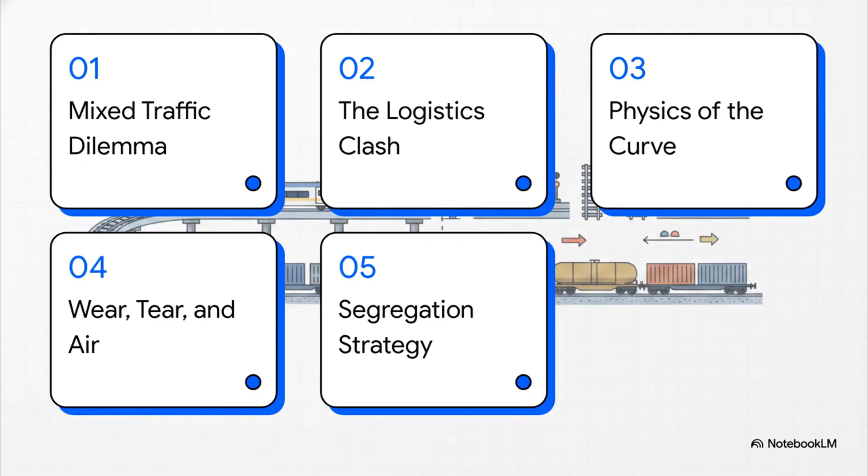All right, starting us off, Section 1, the mixed traffic dilemma. Let's look at our track usage options. We essentially have 4 ways we can run trains across a network. It's kind of like a sliding scale. Up at the top, in case 1, you have total segregation. High-speed trains stay strictly on high-speed lines, and classical trains stay on classical lines.

But as you move down to case 4, you see complete intermixing, where all types of trains run on all types of lines. And while systems in places like Germany and Italy have historically tried mixed models, it sets the stage for some massive constraints. Because honestly, when you choose intermixing, you are inviting chaos.

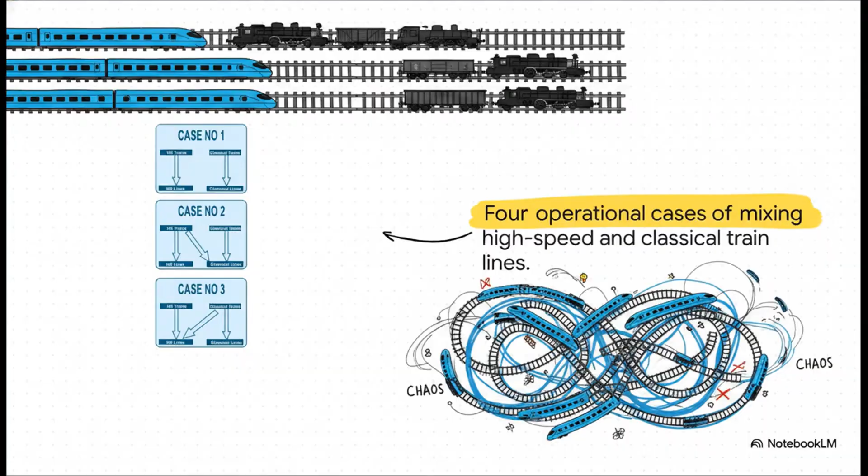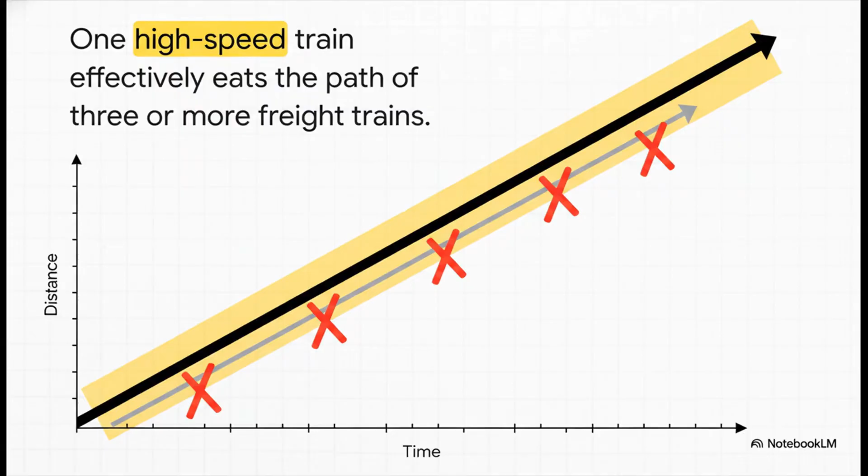Moving right along to Section 2, the logistics clash. Let's talk about the speed conflict. Here is the wild thing from a pure logistics standpoint. If you slip just one single high-speed train, we're talking traveling at over 300 kilometers per hour, into a conventional, slower train schedule, it literally eats up the operational path of 3 or more freight trains. Let that sink in. You aren't just adding a fast train to the tracks, you are actively deleting the capacity for freight.

Picture this on a timeline. At minute 0, a slow freight train rolls out. 15 minutes later, a high-speed passenger train departs on the exact same track. By minute 30, that high-speed train has entirely caught up to the heavy freight ahead of it, forcing a massive system bottleneck. So you basically have 2 terrible choices. You either force the freight train onto a side track to wait, which totally kills its efficiency, or the high-speed train is forced to crawl behind it, completely neutralizing its own speed advantage.

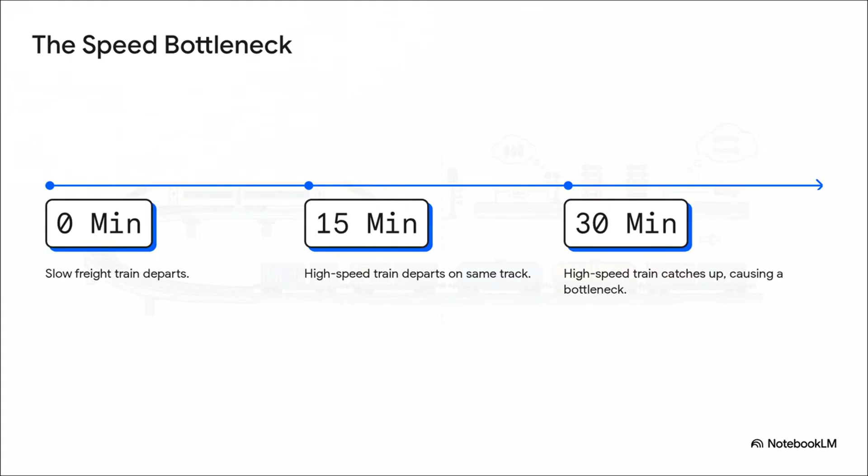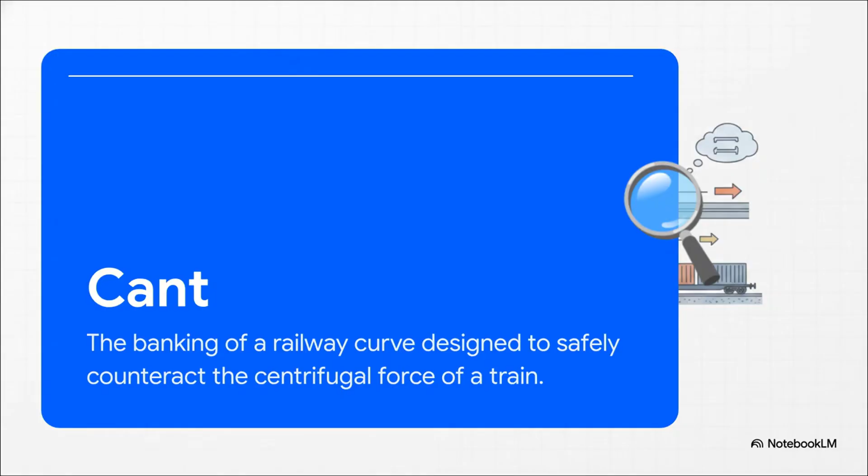Okay, Section 3. The physics of the curve. Let's get into track geometry and cant. Now, to really grasp track geometry, we have to talk about cant, also known as equilibrium superelevation. Think of a steeply banked curve on a NASCAR racetrack. That cant is absolutely essential to keep a train from flying off the rails when it takes a turn. The track is literally tilted inward. But here's the catch. The exact angle of that tilt is entirely dependent on the speed of the vehicle.

Let's put this into perspective with a standard curve that has a 4,000-meter radius. The physics here mathematically forbid any sort of compromise. A heavy freight train cruising at 80 kilometers per hour requires only 19 millimeters of cant. But a high-speed passenger train taking that exact same curve at 300 kilometers per hour requires a massive 265 millimeters of cant. If you try to invent an intermediate bank angle to sort of split the difference, it dangerously exceeds the safety limits for both train types.

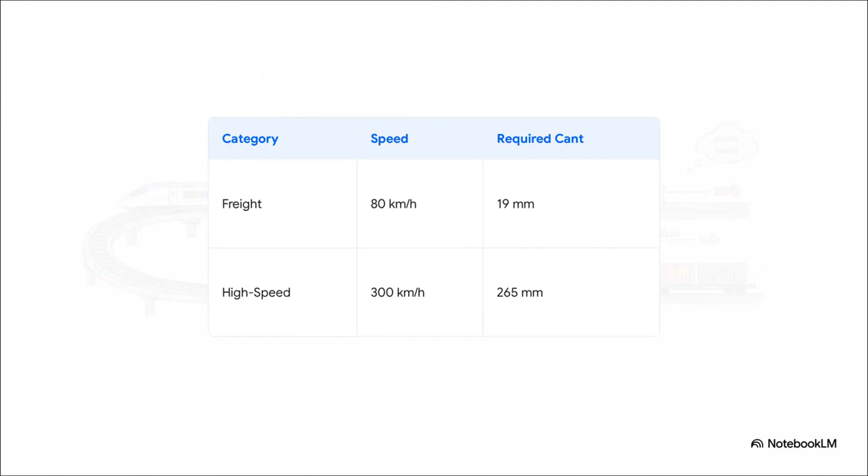Looking at these numbers, you can easily see why providing a track geometry that safely accommodates both 19 millimeters and 265 millimeters simultaneously is literally an engineering impossibility. If the track is banked up high for the fast train, the slow freight train will tip inward, putting immense, destructive weight on the inner rail. But if it's banked low for the freight train, the high-speed train is at a huge risk of derailing right off the outside. You just can't negotiate with gravity.

Which brings us to Section 4, wear, tear, and air, the harsh realities of safety and maintenance. Let's talk about sheer mass for a second. Heavy freight locomotives are absolute beasts designed for raw pulling power, and they exert a brutal, bone-crushing 23 tons of axle load downward onto the steel rails. Now, contrast that massive weight with a high-speed train, like the French TGV. High-speed rail sets are strictly capped at just 17 tons per axle.

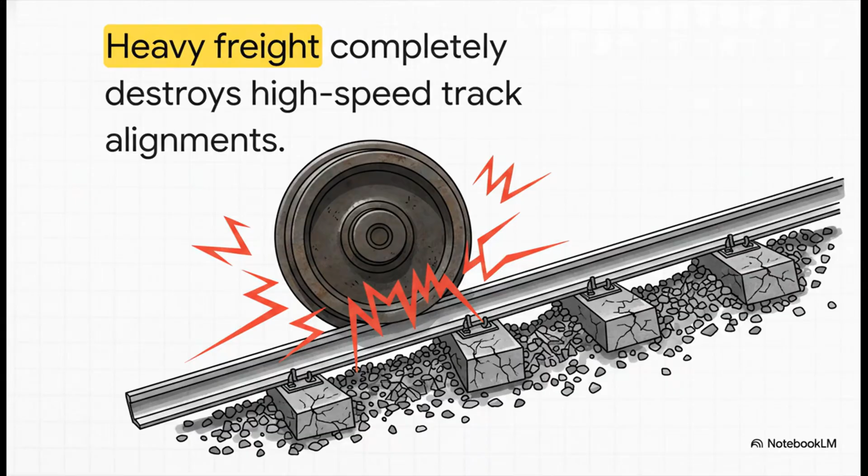Why? Because flying along at over 300 kilometers per hour requires absolute perfection in the track, and lighter axles are what preserve those microscopic track tolerances. So if you run those 23-ton freight beasts over our pristine, highly tuned passenger corridors, it makes it impossible to maintain the flawless track geometry required for safe high-speed travel. Studies have proven that heavy freight quite literally beats the high-speed track alignments right out of place. That makes it incredibly dangerous to then send a passenger train rocketing over it at top speed.

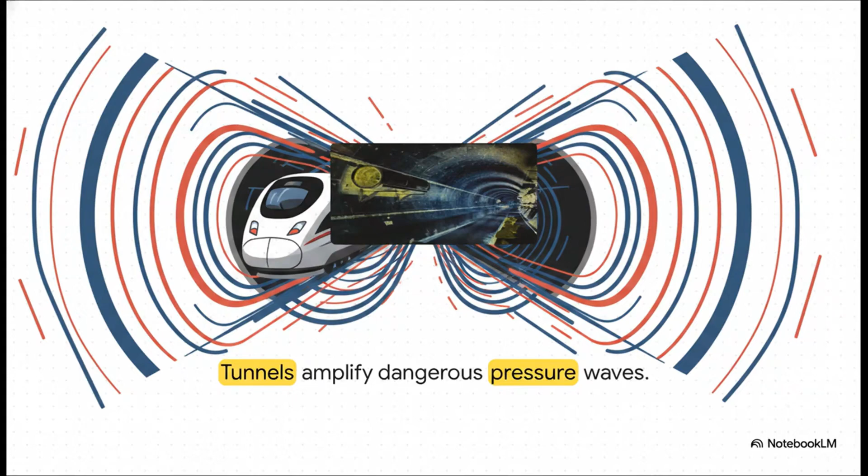And hey, if the track wear didn't convince you, wait until we talk about the aerodynamics inside enclosed spaces like tunnels. It is terrifying. When a train enters a tunnel, it pushes a wall of air ahead of it, acting almost like a massive piston. The sheer aerodynamic violence of mixing these two types of traffic inside a tunnel is staggering. Imagine a high-speed train and a freight train passing each other going opposite directions. The relative speed difference can hit up to 700 kilometers per hour.

That creates an explosive burst of air pressure when they first pass, immediately followed by a vacuum-like drop. These micropressure waves severely stress the passenger train's windows. And even crazier, the sudden shockwave of air can literally destabilize the heavy freight. We're talking violently ripping off cargo covers or shifting entire loads. To avoid an aerodynamic disaster, engineers are basically forced to either drastically reduce speeds or just separate the trains entirely.

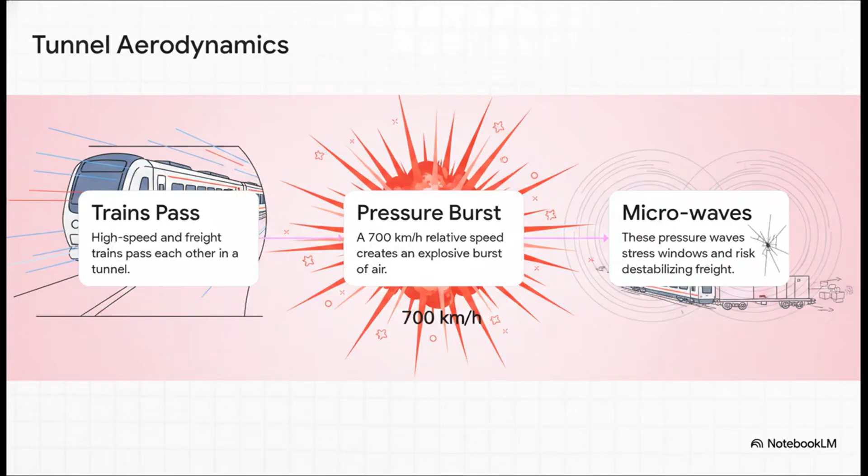All right, our final section, the segregation strategy, why this is the ultimate win-win. So, by building entirely new lines strictly for fast passenger trains, we don't just solve all those physics and aerodynamic nightmares we just talked about, we actually strike an economic goldmine. Yes, it prevents the heavy freight from destroying the new passenger tracks, but crucially, by pulling the passenger trains off the legacy networks, we release massive path capacity on those older lines.

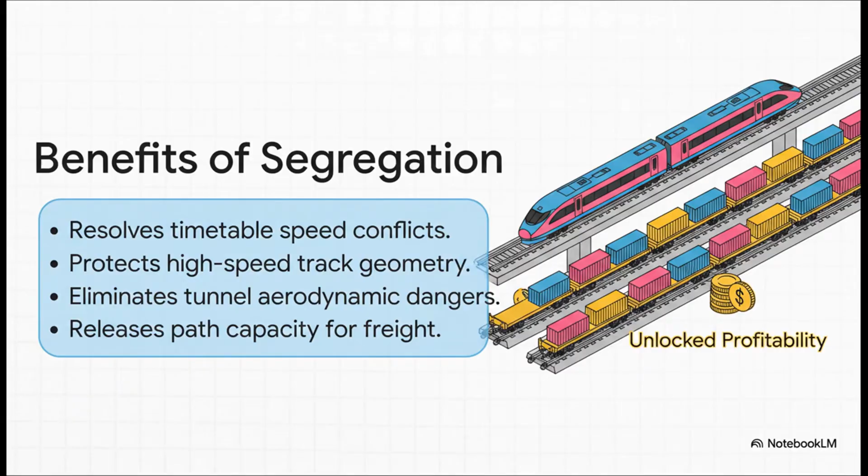So as global traffic demands absolutely surge, it leaves us with a pretty provocative question about how we design our cities and transit networks going forward. We often tend to think that integration is always the answer, but the relentless logic of track geometry, speed, and aerodynamics proves that sometimes the absolute best way to bring a thriving, high-capacity transportation network together is to meticulously keep its components apart.